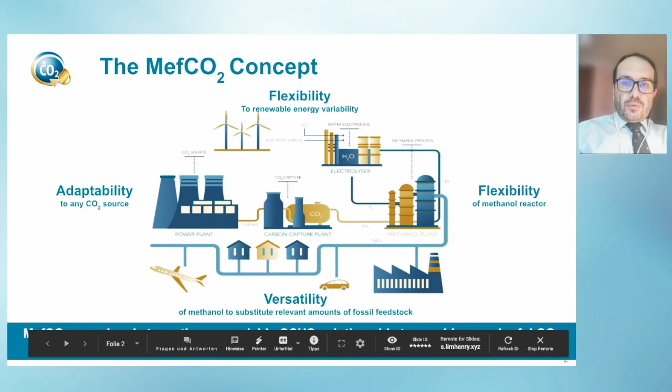The other thing was it had to be flexible, because this kind of concept requires hydrogen, green hydrogen, if it wants to be sustainable. So we need to adapt to fluctuant renewable energy generation. That's quite important - you need a hydrogen technology that allows you to adapt to that. In this case, we used PEM technology.

And the hardest thing was to develop a flexible production process. We developed a process that could also change its output according to the availability of CO2 or green hydrogen. So that's not very common, but the process can adapt - it can even go from its nominal capacity to 40%, so that you can adapt the process itself to the conditions of availability of green energy and green hydrogen. So that was quite challenging.

And the next thing was to produce a product that was versatile enough to have a huge demand. So we chose methanol, because it's produced in hundreds of megatons worldwide. The demand is high enough so that the carbon capture and utilization has a meaningful impact on CO2 reduction. We would have gone for polymers, but the impact would be lower. So we went for a large volume chemical such as methanol.

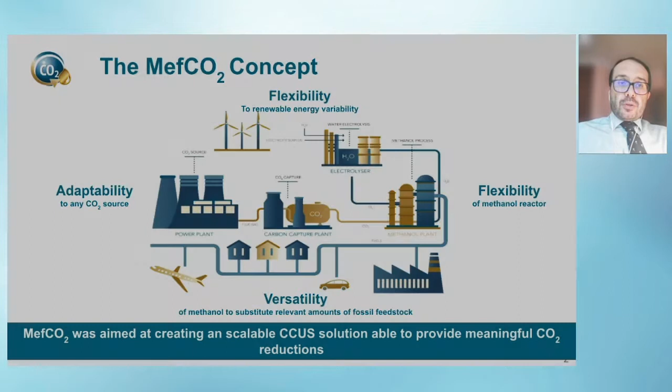As I mentioned, we had a first demo running already by the time the project kicked off, but the conditions were different from what we've got here in continental Europe. One of the partners of the consortium had a pilot plant running already in Iceland. It ran on geothermal power, and on CO2 from geothermal generation. So it was quite difficult - we needed to move the concept into the conditions we could find in continental Europe.

So the concept is what you see here on the screen. We located our pilot plant in Niederaussem in Germany. We use post-combustion CO2 capture already built in the lignite fired plant owned by RWE. We use PEM electrolysis, and we were able to demonstrate that we could produce 1.5 tons of methanol per day, adapting to the conditions in terms of green hydrogen and green energy availability. That's quite a challenge, but we were able to succeed and demonstrate it.

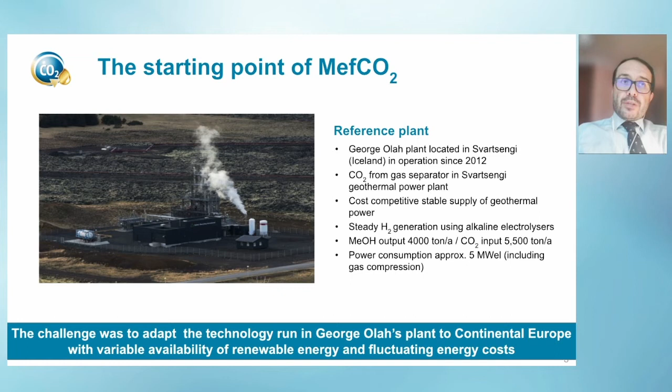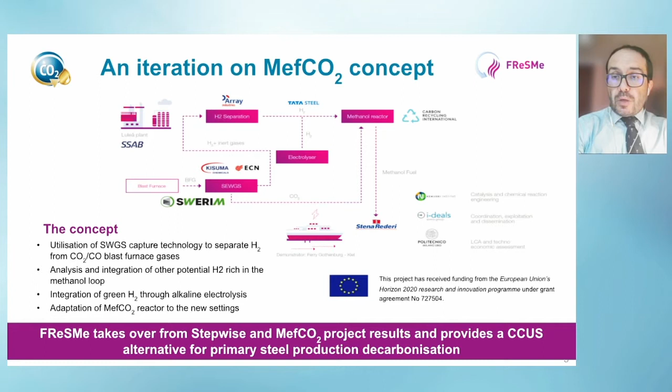We are right now demonstrating, and we plan to run a trial that you will see in our last slide early next year. We've been stricken by COVID, but the test pilots started yesterday, so we are on the right path to accomplish our objectives.

We want to thank the European Commission for funding this research. I think it's a clear step in the right direction in the decarbonization of hard to decarbonize industries such as steel manufacturing. Nothing else from my side. Thank you very much for the opportunity to present today.

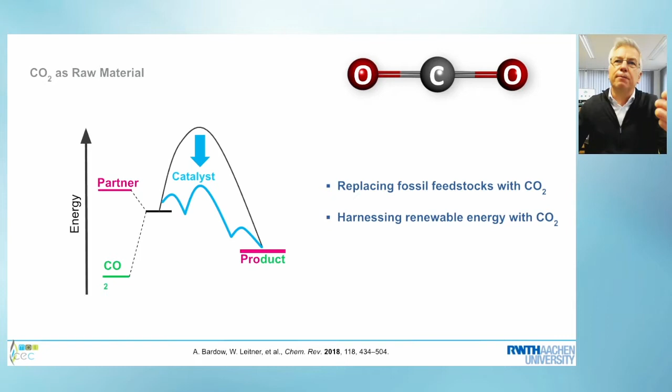Let me give you one example for the first part, replacing fossil feedstocks, and then move to the second part, harnessing renewable energy.

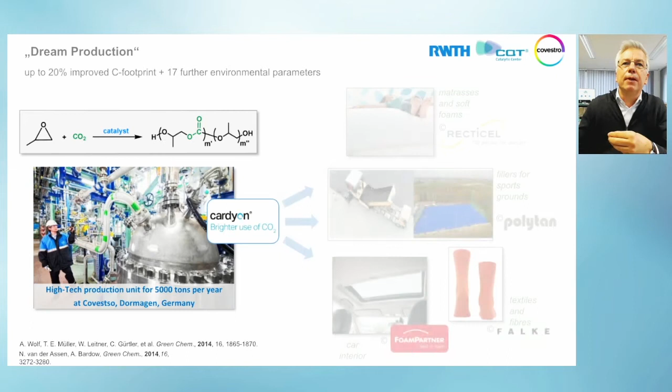This is a project that has been mentioned by Soren just before. It's a collaboration of the company Covestro with RWTH Aachen University and a number of other partners, where these particular molecules—if you're not a chemist, you don't have to look at them in detail—these products, called polyols, are produced with the incorporation of carbon dioxide as a feedstock, as a raw material. These polyols are important building blocks for polymers called polyurethanes, which have many, many different applications. It's now possible to make these materials by replacing about 20% of the petrochemical feedstock—we still need the petrochemical feedstock, but now about 20% less.

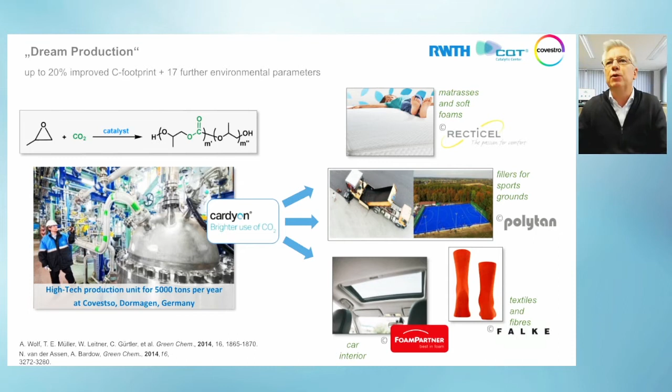This material is now being tested in a range of real-world applications like soft foams, mattresses, textiles, sports grounds, car parts—everywhere polyurethanes are needed today. This testing is ongoing, and the production capacity built up to do that is 5,000 tons per year. That's already quite sizable, but the full market of polyurethanes is in the millions of tons, so much bigger than that. And if we can reduce the carbon footprint by 20%, that's certainly an achievement.

But ultimately, of course, we would like to go to a situation where we use green energy as the intake, and no fossil resources at all anymore. And just in the talk before, methanol has been already introduced through this wonderful project, MefCO2. There is a range of other projects on national and also international level, not only in Europe, also outside of Europe. China is also investing in these technologies to now use renewable energy to generate hydrogen and then combine hydrogen to make, for example, methanol, which is a very important component.

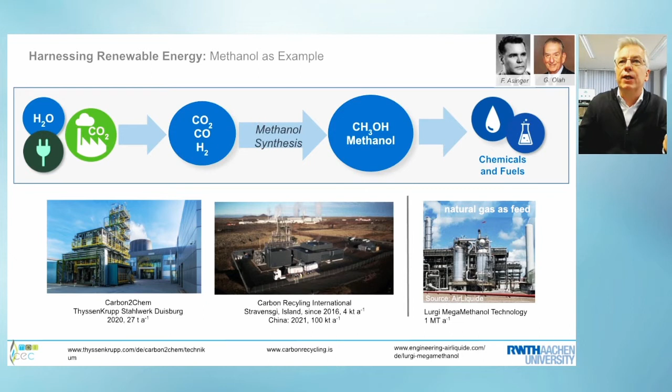And this technology in principle is very much scalable, because we make today methanol from the same kind of resources here, but based on fossil feedstocks on a 1 million ton scale. So we have really here the potential to go into scalable technologies.

But on the scientific part and on the discovery part, we can use CO2 and hydrogen to make many more molecules. And of course, society is not interested in molecules as we chemists are, but society is interested in the final products like surfactants, coatings, fragrances, fuels, of course, agrochemicals. And this really opens a whole possibility, a huge range of opportunities to make valuable compounds from CO2 and hydrogen on, again, scalable technologies.

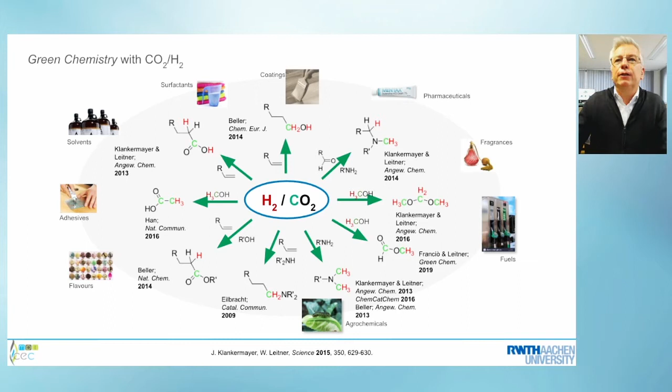Now, let me talk about two aspects here. One is, where do we get the CO2 from, and where do we get the renewable energy from? We have a lot of point sources of CO2.

One minute left, more or less. I'm getting to that. Now the slides are gone, but I can just tell that also with... at least I don't see them anymore. I'm not sure, can you still see the slides?

Okay, so we have enough CO2 from various point sources. We have renewable hydrogen in Europe available in sweet spots. And we have to combine these two things to come together.

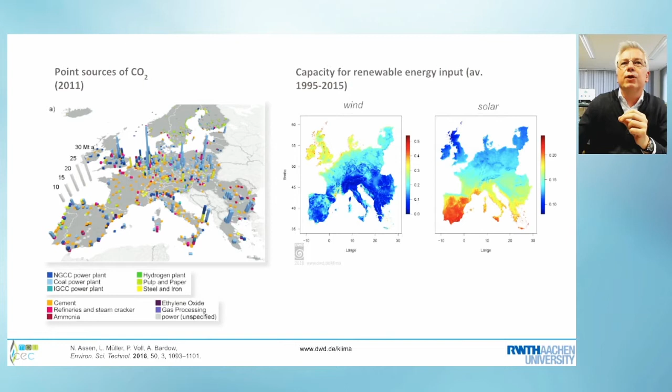I will skip over the financial parts and just come back to the point that has been made. We have to bring this to society, to introduce this to society and take everybody along, because we know that especially the young generation will not talk about the technology details, but wants to see the opportunities for the future. And we can do that.

And let me just close with the general vision and ultimately with a quote that I like a lot from both Max Planck and Nelson Mandela. Insight has to precede application. We have to think ahead, what can we do in the future, and provide the technology and innovative basis we are very good at in Europe. And then we have to do it, because it only seems impossible until it's actually finally done. Thank you very much for your kind attention.

Well, thank you, Walter, especially for this last quote. And indeed, CO2 and hydrogen can do miracles. We will see a little bit later what are maybe the obstacles and what we need to really make it a reality at industrial scale.

Now, I'd like to introduce the last speaker, Carl de Maré. Carl is currently Vice President of ArcelorMittal, the famous steel group. He's Head of Technology Strategy for ArcelorMittal Europe, but he is also, and speaking today, as Chairman of ESTEP, the European technology platform for steel. Carl graduated as civil engineer in electromechanics from the University of Ghent, and he has basically made his whole career in what has become the ArcelorMittal Group, since he started as application research manager at the Sidmar Research Institute, was head of the steelmaking department afterwards, and then continuous improvement and industrial optimization for flat of ArcelorMittal. So he has held the position of CTO at Flat Carbon Europe, and then became corporate technology strategy for the ArcelorMittal Group Europe.

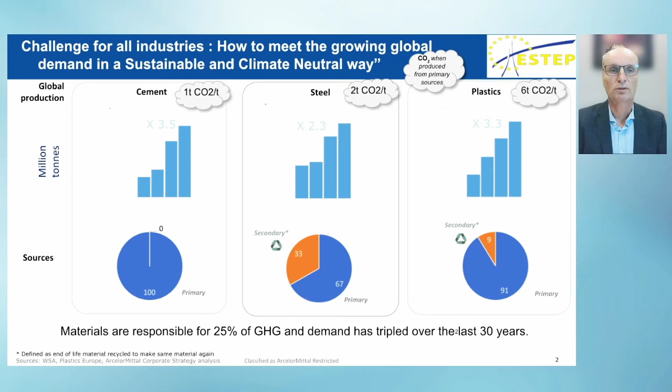Together we represent more or less 25% of the greenhouse gas emissions. However, we don't need only to bring that down to zero. We also have to find ways to produce it in a fully circular way, because the evolution of demand for materials of the last decades will not change. We only see more demand for high value-added materials if we want to make the transition to a net zero carbon world. And here I think the steel makers really took a high commitment.

I copied just some of the commitments we did as ArcelorMittal, but that's also true for the other steel makers. We announced that with the steel community, in 2030 we already want to be 30% below emissions of 2018, which is in fact a 55% reduction versus 1990. And for ArcelorMittal, I think we are the first global steel company who committed that.

We not only committed to become carbon neutral in Europe, but even at a global scale. And then the question is: what trends do we see, or what solutions do we have in the portfolio in order to reach that goal? Well, in fact, there are three clear drivers, which we already have seen also in the previous pictures.

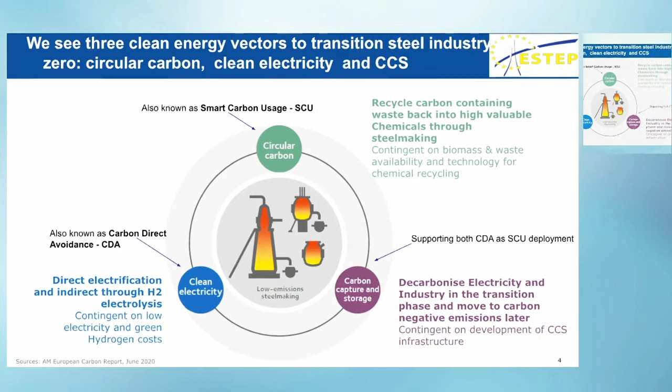One is definitely to go to clean electricity, try to electrify - in our steelmaking vocabulary we call that carbon direct avoidance - to do the primary ore reduction with electricity instead of with carbon. However, the amount of low and green electricity you need for that will be a constraining factor. So the second point is really circular carbon.

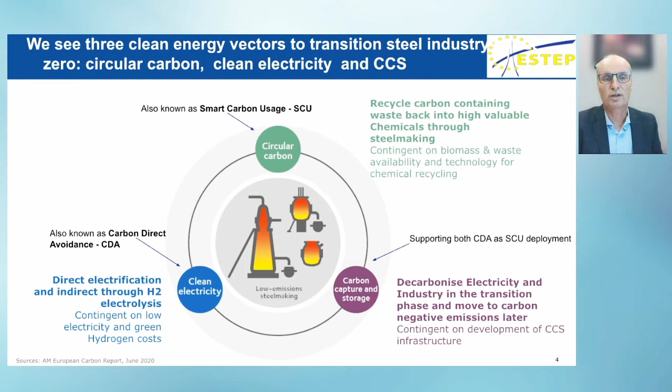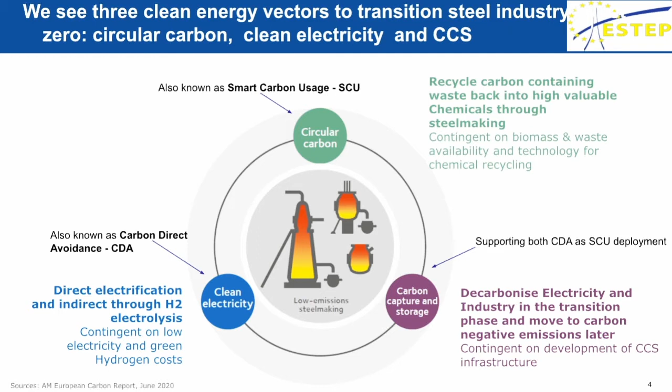But then third of all, we believe that also carbon capture and storage is important in the short term, to help green the electricity and to help scale up the circular carbon processes. And in the long term also, if you combine the three together, to create a circular or even a net negative emission.

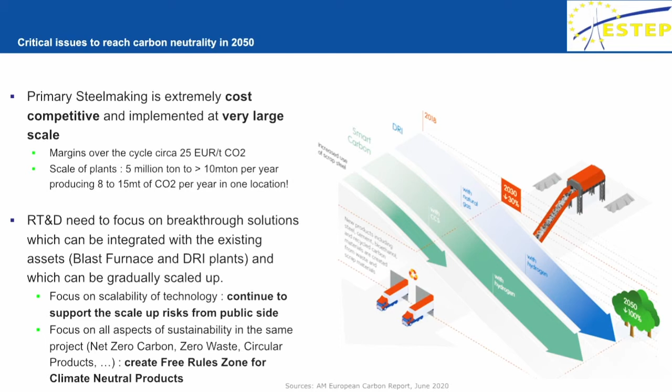So the challenges, and where we really believe R&D is needed, it's on the scale and on the competitiveness. Steel plants - and there are only a few left in Europe - are very large scale, very efficient. And so where we need to focus on technology, it needs to be technology which can be scaled up to a large extent, and at the same time also have the potential to help the circular economy in order to create value.

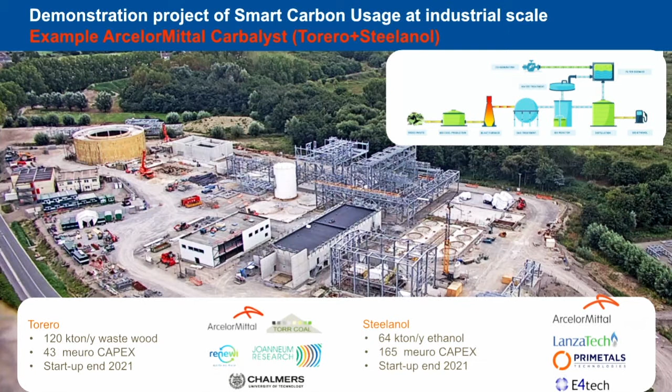Otherwise, either the technology will not be affordable, or the technology will not be scalable. And I have two examples from our steel community. One comes from ArcelorMittal: a very attractive and very ambitious project where two technologies are combined, the Torero technology with the Steelanol technology, to convert waste wood into an alternative carbon-containing reduction material for the blast furnace.

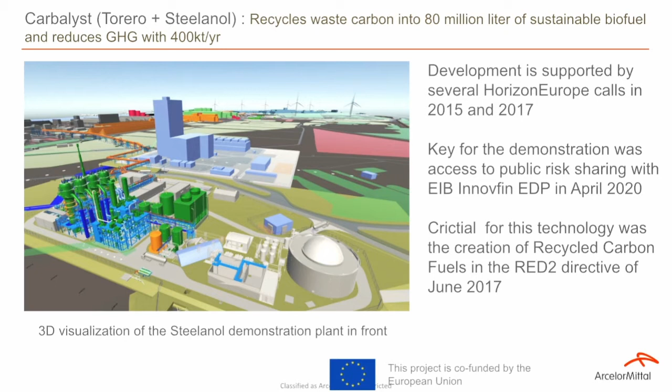And then to use the blast furnace gas with a biological catalyst - in this case with microbes - to convert that back into ethanol. A project which I think is also illustrating the challenges that we had. So it was highly supported by DG RTD in 2015, 2017. However, it was not enough.

We talk here about a 200 million euro investment, really, as said by Barend in the introduction, a really industrial large-scale demonstration. We had to find additional risk-sharing mechanisms in order to make it possible.

And I think also an important element is that the legislation for this type of product, this type of ethanol which is produced, had to be reviewed, and so we needed a review of the RED, the Renewable Energy Directive, in order to make this product possible into the market.

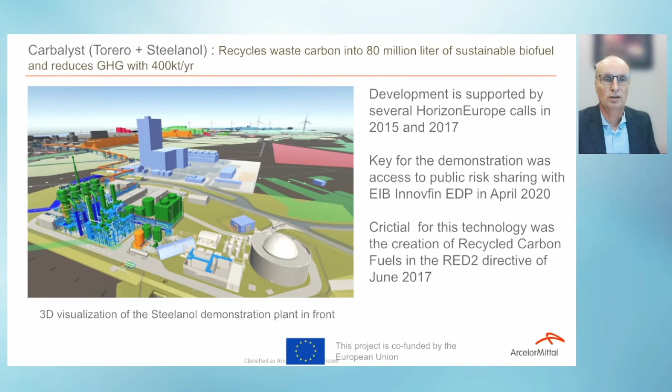And then another example is from voestalpine, on the need of scale of green hydrogen in order to decarbonize the industry, where for an existing 2 million ton plant, we need to go to a 700 megawatt electrolyzer scale, where today technology is about 10 to even 1 megawatts. So we need here to scale up the technology still with a factor of 100 and bring down the costs with a factor of 3 to 4.

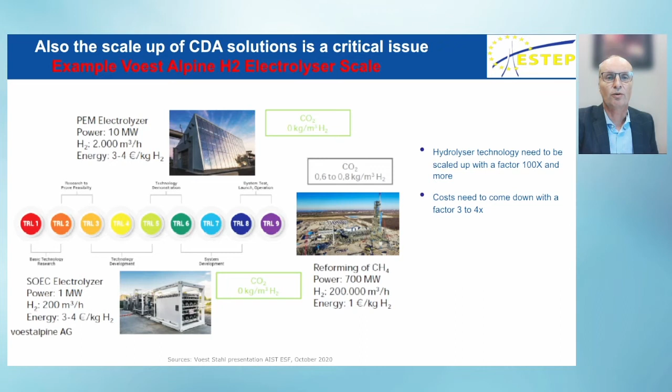So just to summarize, I think R&D is key. We have technologies available. However, we have to think out of the box. We can't stay within our sector. We need to think of technologies which can be implemented on existing assets, which will create value in society.

By producing more circular products. And here, I think one of the challenges I still see is that those circular products need to find a proper place in society. So we will need legislation also to promote those circular products, so that they are preferred over the current fossil-based carbon products. So thanks for your attention, and looking forward to the debate.

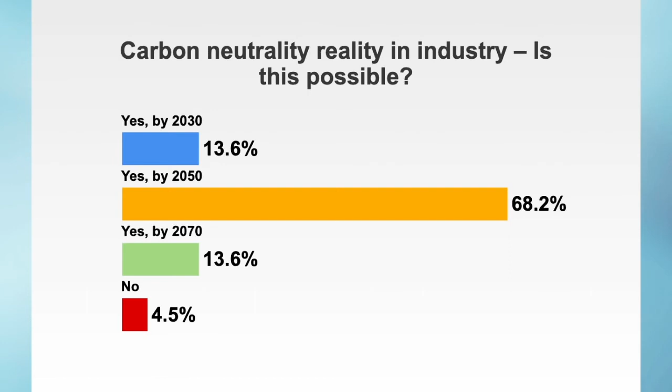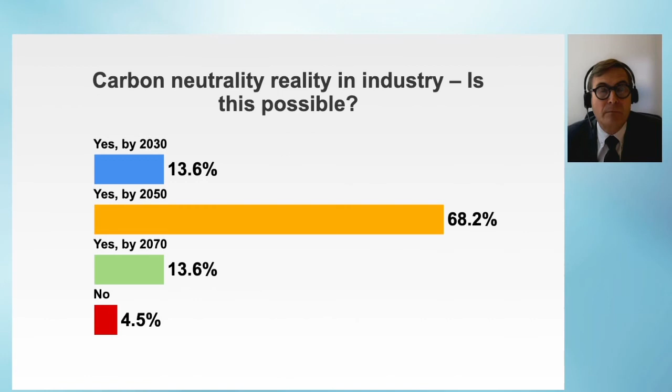So these are the polls, and I think you can already see them here on the screen. It seems like the majority of the audience thinks that carbon neutrality in industry is indeed possible by 2050, which is also the ambition of the Green Deal. That's nice to see that we have a receptive audience in that regard, and that they agree with us on getting there. I think then we can open for the next poll, and then at the same time we can go back to Pierre.

So the next poll is what is the biggest hurdle in achieving climate neutrality in industry by 2050? Again, there are four questions, but we will take those after the next question. Pierre, over to you. Yeah, thank you, Soren.

So I will turn now to Barend again, and we've talked about competitiveness, and you mentioned, Barend, also in your first question, the importance of reaching out to the international world, because obviously Europe is not alone in influencing climate change. I think we represent only 8% of CO2 emissions. So clearly we have a role model to play, but how do you think Europe could foster the other regions in the world in the direction of carbon neutrality? What other actions do you think you should take in place at worldwide level to reach this influence and fostering?

Okay, thanks for that. Now, let me start from my comfort zone, and that's the world of research and innovation. Clearly, research and innovation always has been a great catalyzer for integration across borders, for working together across borders. So in the field of research and innovation, definitely there's tremendous scope to collaborate. The technological challenges are diverse, but many are common. By pooling our resources together, our ideas together, our brains together, we can achieve so much more. So that is an evident field where we can try and achieve that.

Very good. So the next poll is what are the biggest hurdles in achieving climate neutrality in industry by 2050? There are four answers possible: A is competitiveness versus non-climate neutral players, availability of green electricity, appropriate technology solutions, and social issues related to unfavored areas. And this is a little bit of a surprise - it's very balanced. So we can see that most people do not think that it's competitiveness versus the outside world or third countries, but it's more like the social issues which are related to unfavored areas.

And the two others, the availability of green electricity and the appropriate technology solutions, are sort of tied in between. So that is already a very interesting feedback that we have from this audience.

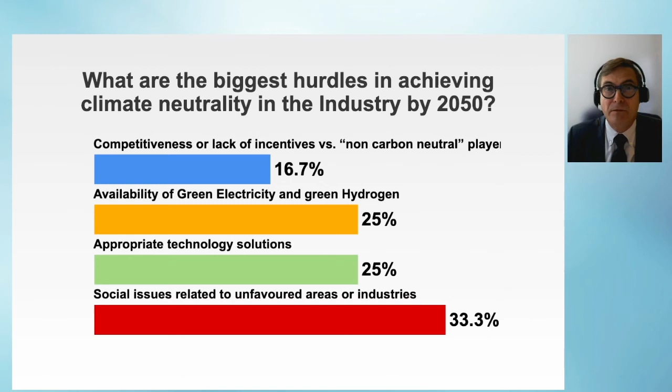So with that, I would then open for the next question or the next poll. What do you think the social impacts of climate neutral industry will be? And then we open the poll, and then we can take the next question in between. Well, for the sake of time, Soren, maybe I would suggest we focus on the poll. I think the answers are coming quickly. Maybe if we can see the results live. It will still take a few minutes normally before they come.

Okay, all right, so I will continue with the panel discussion and turning to Walter again. You mentioned about the need for still fundamental research. And on the other hand, I think when we talk about decarbonization of industry, a lot of people, including me, are insisting on the very high importance to really scale up now what we have already, because we need to be ready by 2030. So there will be a lot of priority on these scaling up activities at higher TRL level. But at the same time, I think you rightly mentioned the fact that we still need to focus on fundamental research. So how do you see basically longer term the place of this fundamental research? How do you see that it will be still supported and not be forgotten by all these different funding tools that are in place?